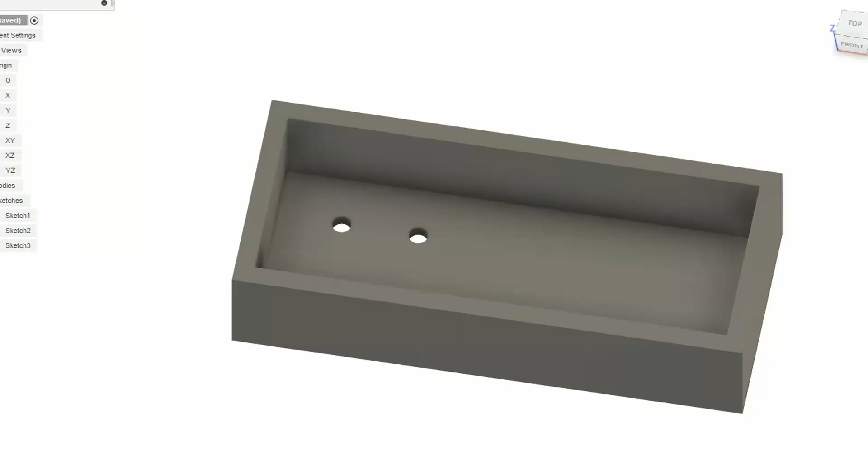In our previous video we learnt the basics of how to create a box. So the box itself, while very useful, isn't very exciting. So in this video we're going to learn how to add the nicer features like a smooth edge using chamfers, fillets, and then how to do an offset plane and add some holes that simulate real threaded screws with countersunk heads. So let's jump straight into it.

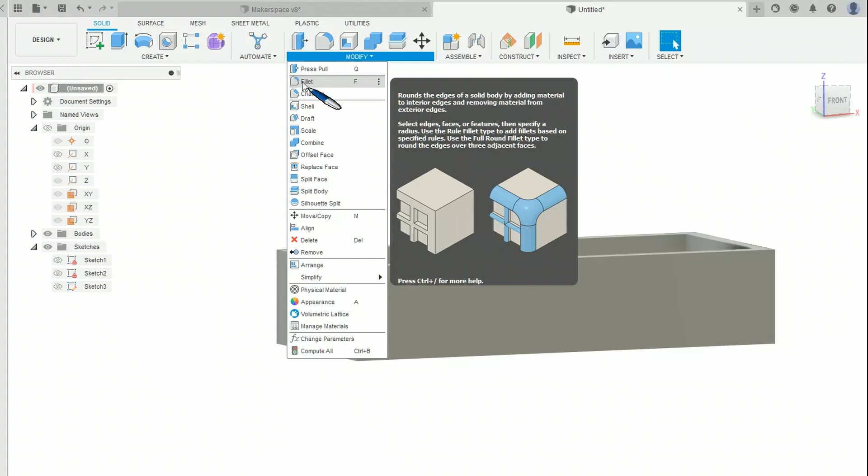So next I want to remove these sharp edges. There's two tools that I can use for that. One is the Fillet Tool that gives us a rounded edge, and the other is the Chamfer Tool that gives us an angled edge, which by default will be 45 degrees. For some of our initial edges, so I'll select that, and I'm just going to do the 4 corners here. So I'm rotating and just selecting those edges one at a time.

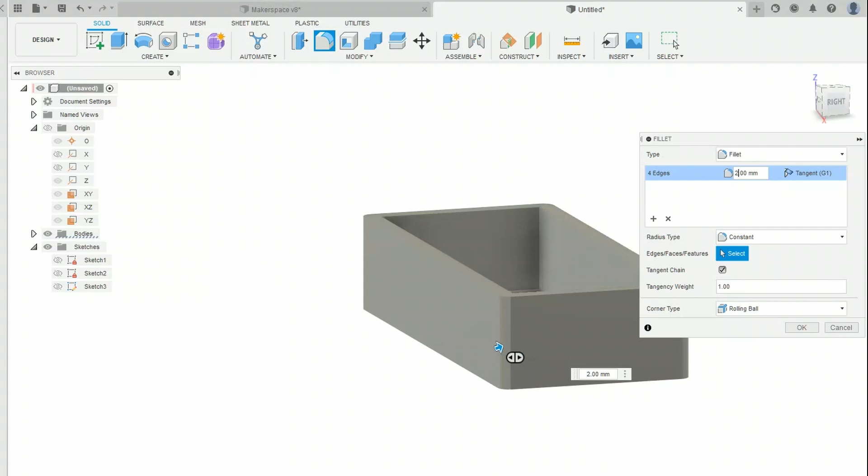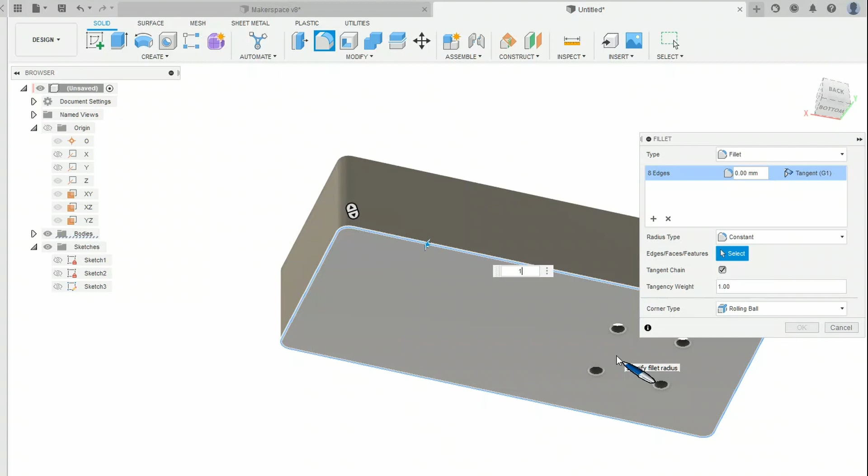So it tells me up here I've got 4 edges, and I want that to have a 2mm edge rolling on it. So you can see from the top view and the preview, that makes it look a nice clean edge there. So I'll click OK on that. And now I want to do the same. So again, using my Fillet Tool on the bottom, but I want a different angle. So I can select that as one complete closed surface, and I'll state that that will just be a 1mm. And OK.

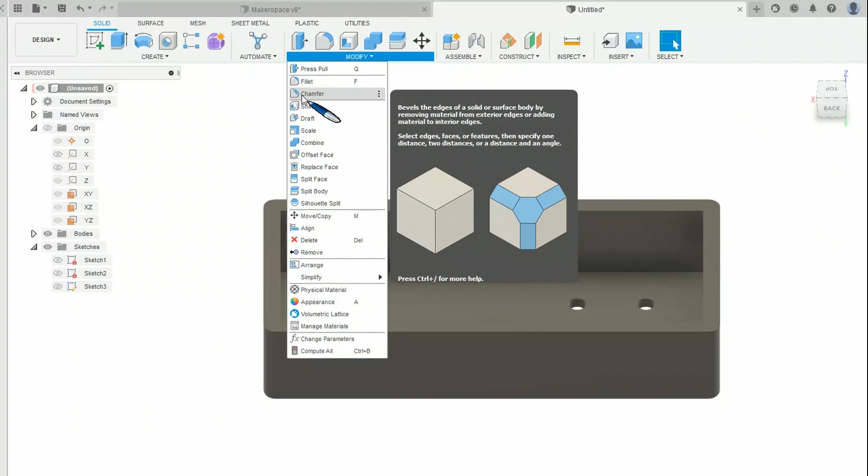In a moment it'll update, so you can see it's a little bit slow there. So I've now got 2mm on these edges and 1mm on this edge. So I've got some nice clean surfaces to work with. Choose chamfer. So I'll choose that outer, and I want to chamfer by 1mm. And again, in the preview you can see that's got a nice 45-degree edge, including over the bends.

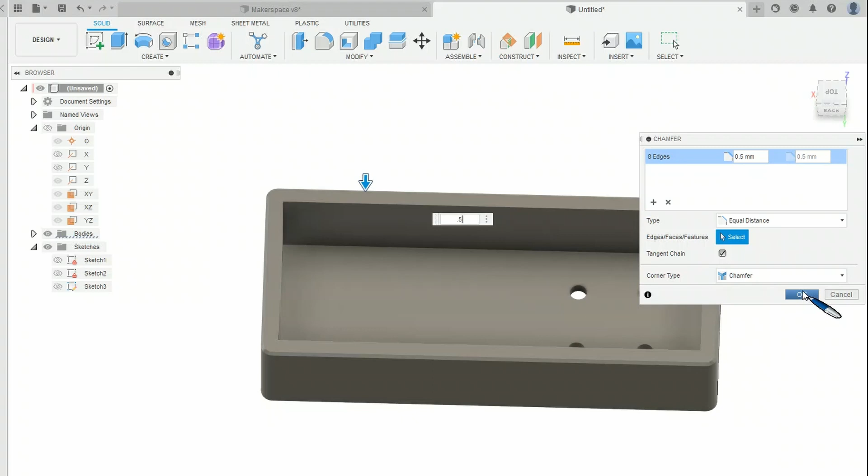So because this is going to have a sealed lid on it, I think I'll actually do that a bit smaller, so I'll go for 0.5 of a mil. And OK. So now I have all of my edges nice and smooth, so there's nothing sharp I can catch myself on, and the inside, it doesn't matter at this stage.

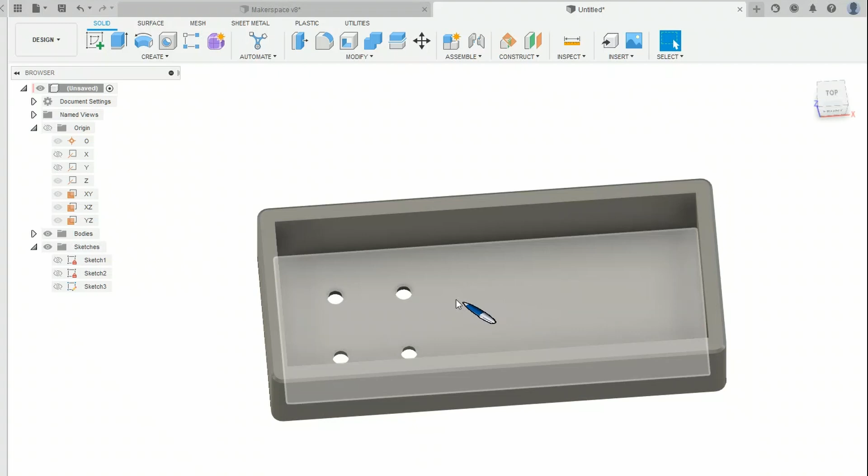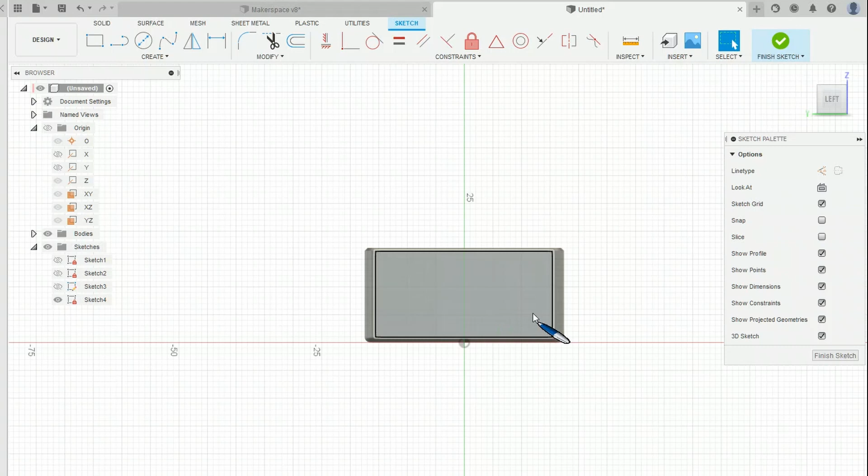So far all of our sketches have been working from the back of the unit. We're going to do a different plane now, and then we'll take it to a totally different level once we've got the hang of that. So I'm going to do another sketch, but this time I'm going to do it on this plane here. So I'll click on that. So it's automatically orientated me, so I'm looking straight onto that.

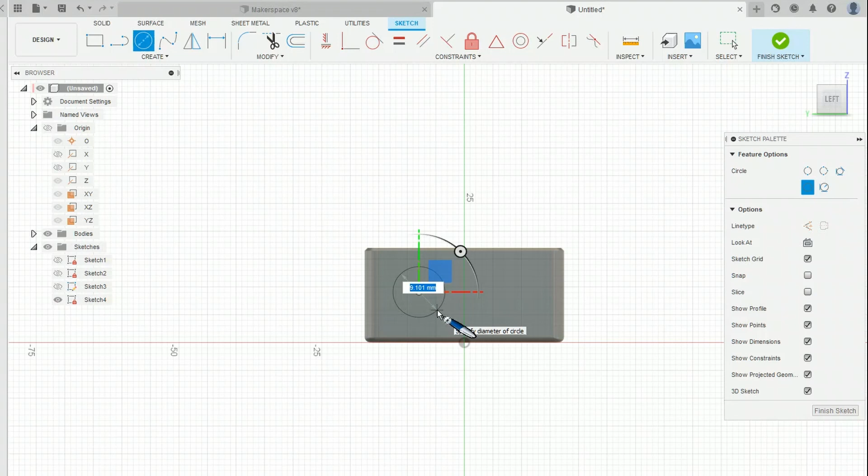And I want to put a hole through there. So let's draw a circle, and I'll just draw it offset from the center for the moment. And I want to make this a, let's say, a 10mm circle. Now to get that to align to the center, there's a few things I can do. I can click and drag, and you'll see when I get to the middle, depending on where I go, I can get it to snap to different points, like that triangle there.

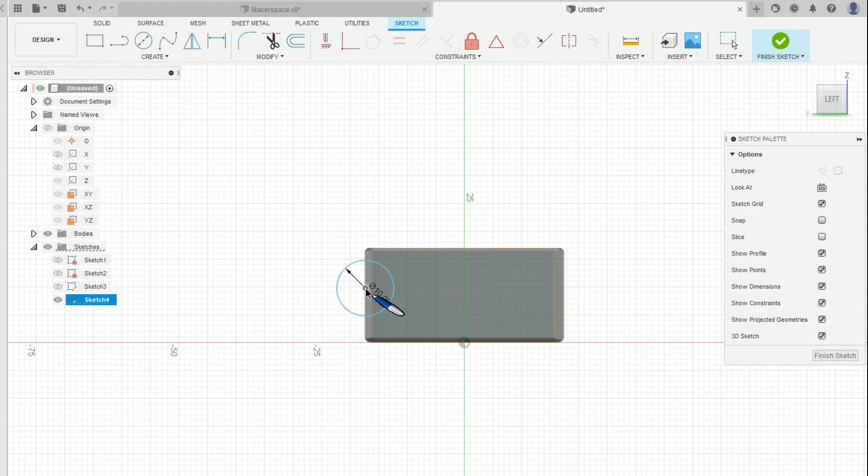The triangle means it's at the center of a line. If I was to do it on this edge, you'll see another triangle somewhere along here. There. And as I go in this case, it gives me a dotted line. You would have had that when I went down as well, but the green line was covering it. So I can bring that over and snap it to the green line, and I now know that I'm in the center of that line and the center of that because of those triangle snaps that happened.

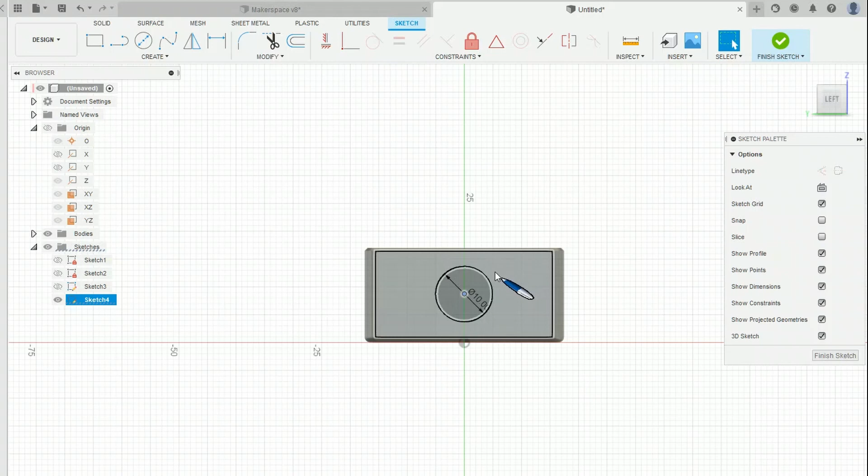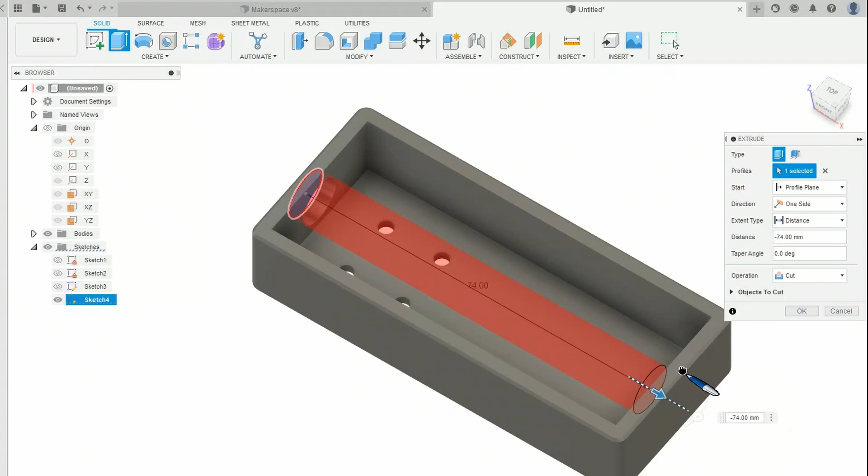So I will finish that, and I'm going to make that a cut through. So I'll pull it down, and I could actually say, instead of just being on that one surface, I want it to come all the way through the other end. So you can see like that, it's making a hole right the way through. So to make it clean, I'll just put it to an object, and I'll click on this as the object, and there it is.

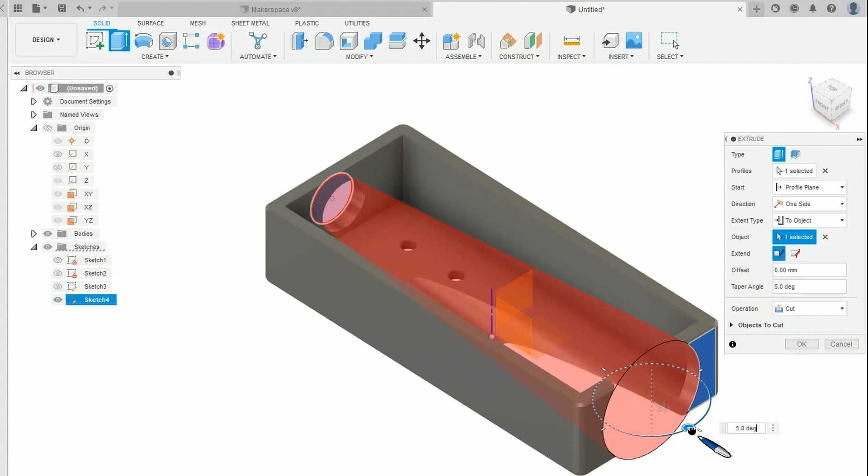You might notice that we've got this handle here. So I can actually make that cone-like. I haven't ever found that I've needed to use that, but it is there if you need to make it flange out for some reason. So we now have a hole right the way through the box based on a different plane.

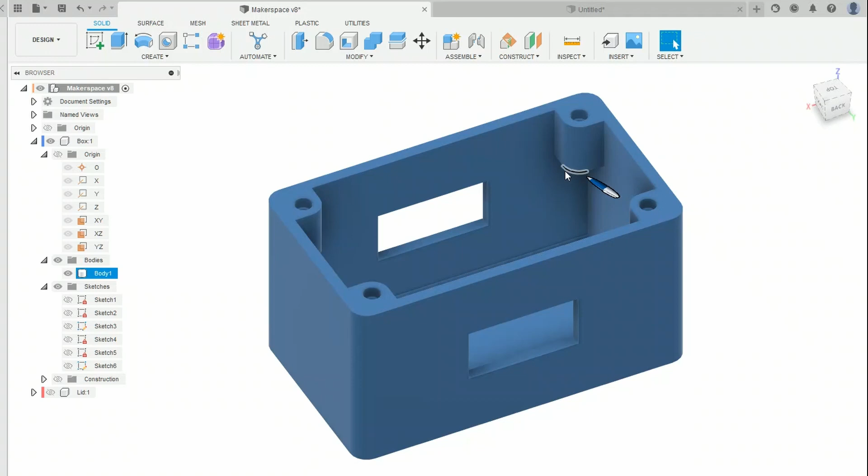So where I've got these surfaces here, I could actually create a plane halfway up the box to say I want to draw from this point. Now in the case of these, that would actually be silly because we could just draw from the top one downward, but for argument's sake we're going to make a plane that's offset from the base to draw these.

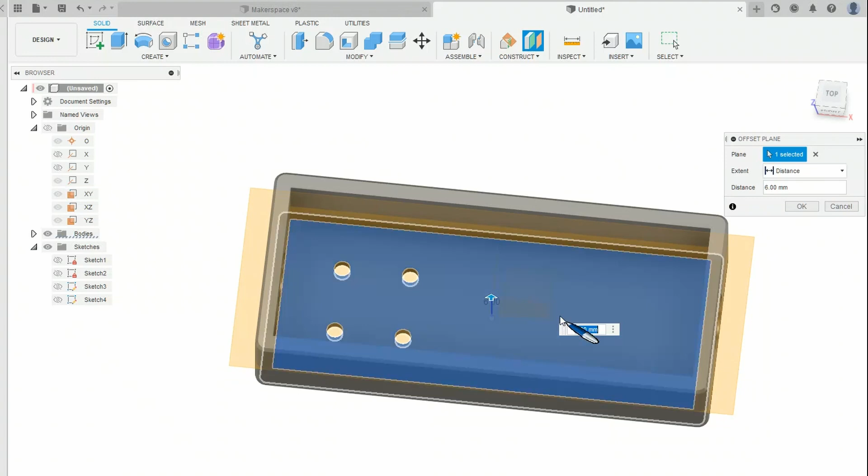So I'll come back to our drawing and I'm going to do an offset plane. So that literally offsets from another surface. So I'm going to choose the inner base as my surface, and I can pull it up or just type in a value, and you can see it's drawing this area that we can then do additional drawings on. So it's called a construction plane. We construct things from that.

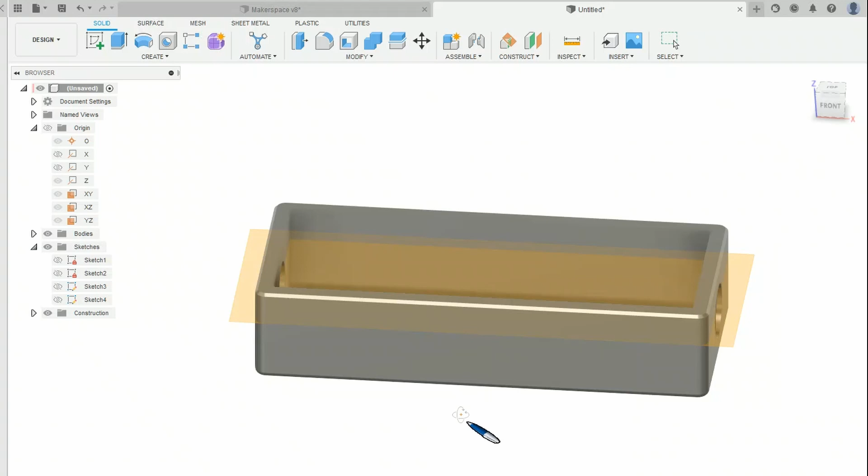So I've come up by 9 mil. I know my box was 15 mil to work with, so I'll go OK on that. And I now have this transparent area to draw on, and if I look over here, we've now got a new section called construction, and we've got this plane which I can turn on and off. So what that means now, instead of having to work with the bottom surface or the top surface, I can work with a surface somewhere in between.

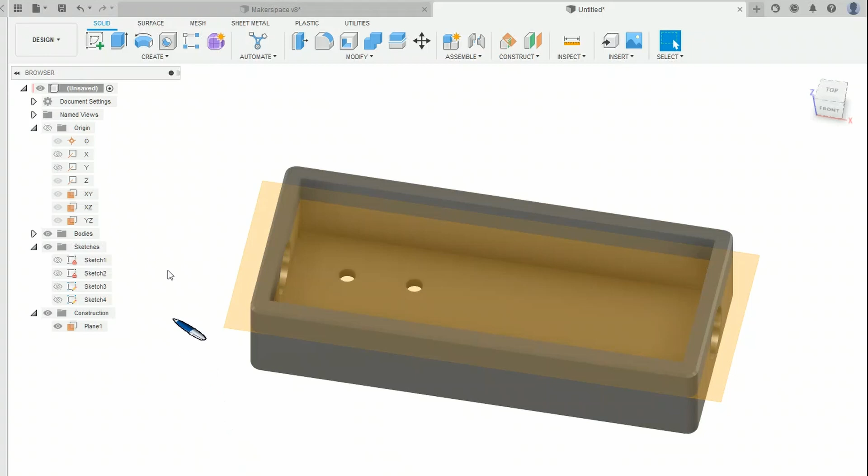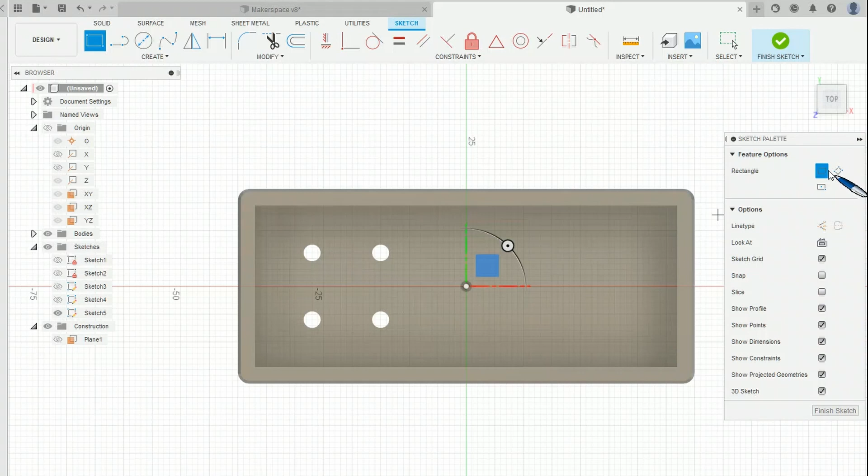So I'm going to do a sketch onto that plane, and we'll draw some lugs that we can mount some holes on. So to do these, I'm going to start off with a rectangle using just the standard 2-point rectangle, and I'll put 1 point in the corner there, and I'll come out and we will make them 6 mil on each side, and enter.

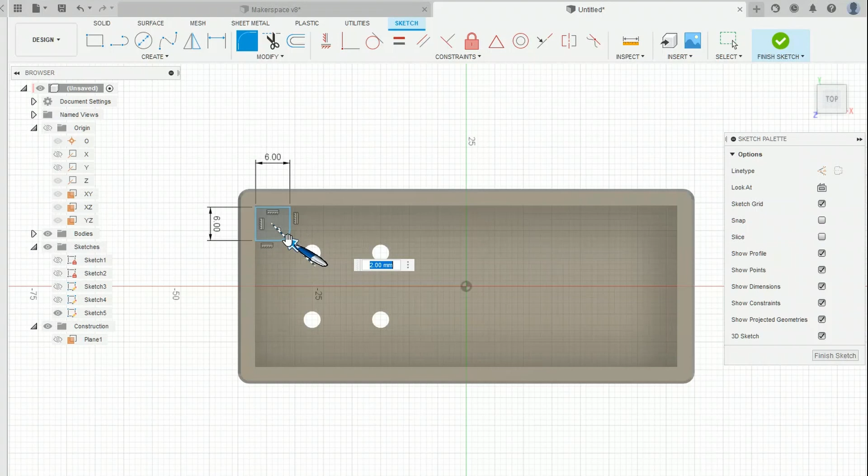I don't want this to be a sharp inner corner, so I'm going to use the fillet, which is similar to the fillet that we used before, but we're doing this at the drawing level. So I've chosen my two sides. I could have just chosen the point as well. It's a 2 mil fillet, and I'll hit enter on that.

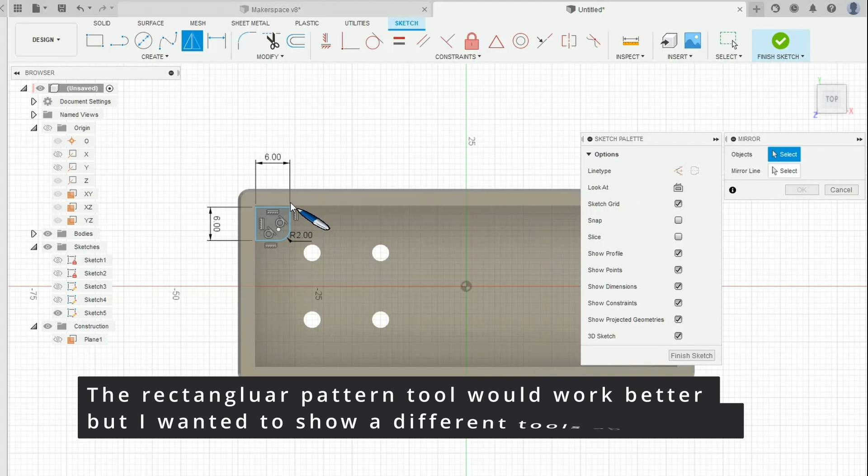And I'm going to show another feature. We could have, using rectangular pattern, done the 4 corners, but we're going to do it this time with the mirror tool. So the mirror tool allows us to mirror across a center line. So I'll select my objects, which will be these points. So I've got to select, in this case, all 5 points. And then I select my mirror line.

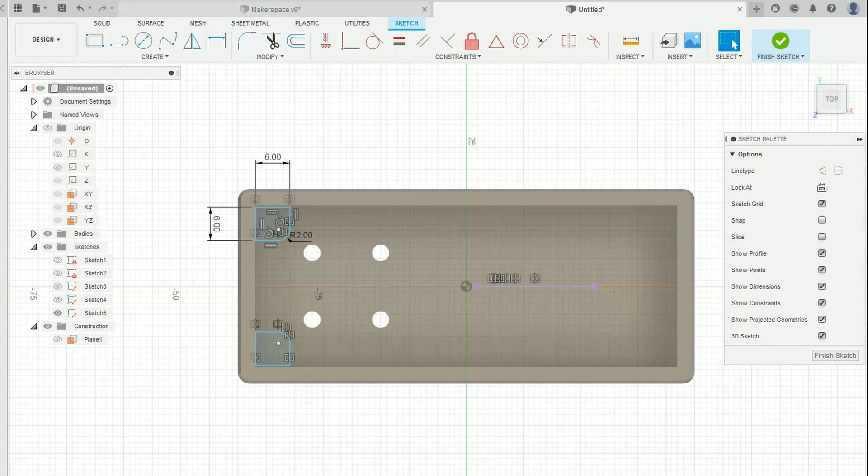Now you might have drawn in a line, but I'm again just going to use my X or Y axis. So I'll do the X first, and it's appeared down here. So I'll go OK. And I'm going to repeat that process again, choosing, this time I'll do a drag to select. So I'll select all of those, and I want to mirror across my Y. So if I just move this across, you'll see it's going to draw it there.

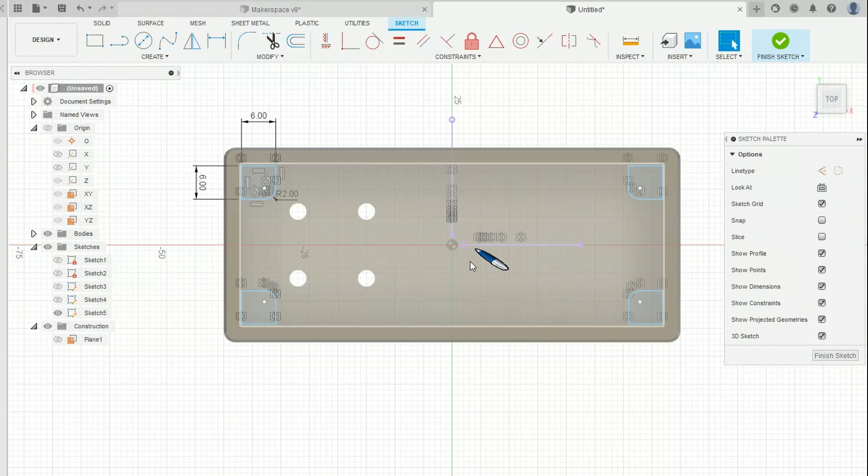Now this has created a whole lot of constraints. Kind of ugly and messy for what we're doing. I just did that as an example of how we could do it. In reality, I would actually use rectangular pattern to do that one there. But like we've seen before, if I now say, oh, I want to make this one a little bit smaller, I want that to be 3 mil, it will do it to all of them automatically. So we'll finish that one.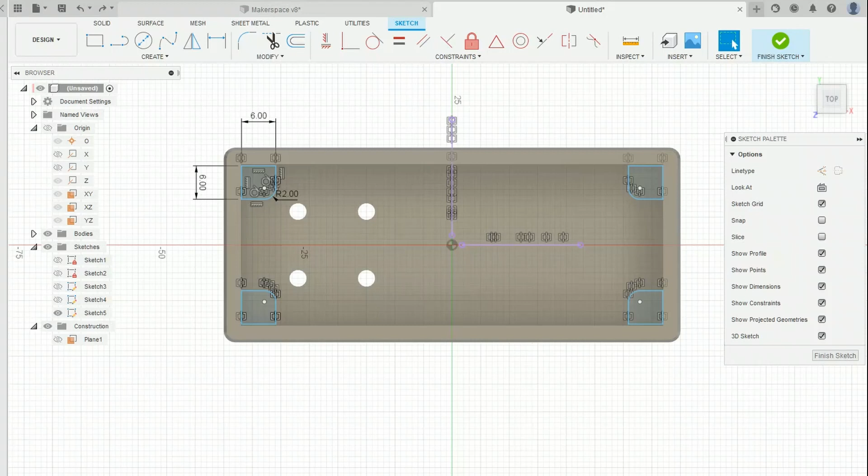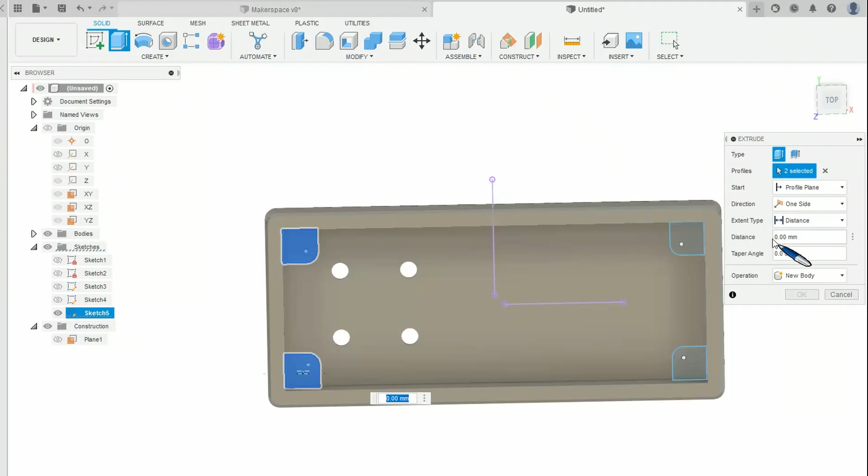And you can see that it's now halfway down the box. It's not at the top or the bottom, it's at that construction plane, which has now become visible because we've used it. And I'm going to extrude these, and I will select all 4 of them. And I'm not going to go quite to the top, we'll go just a little bit below. So we've got 5 millimeters there, leaving just a bit of a gap.

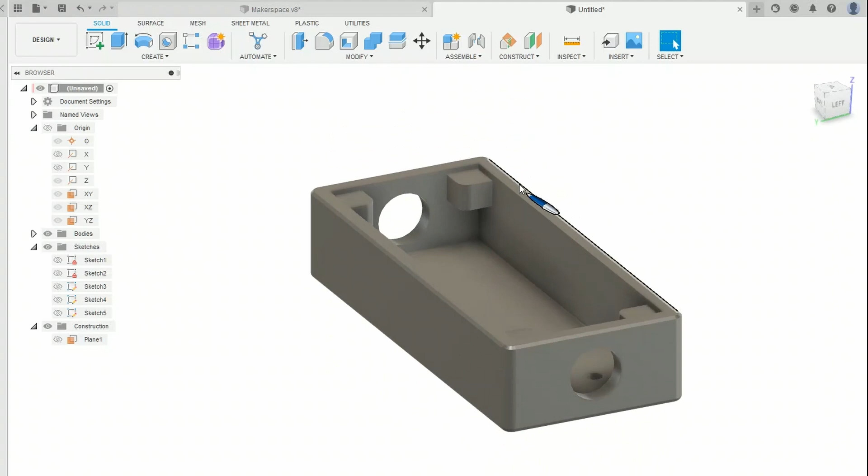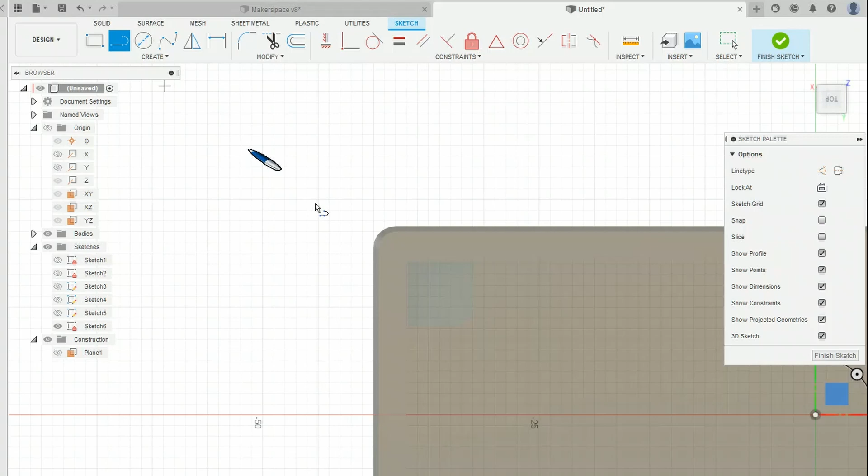So next step will be to put some holes in these. So I now want some holes in these 4 points as mounting holes. So I'm going to do a new sketch on that surface. And I'm just going to throw a couple of construction lines in to start off with, and I'll hover this point here, which will give me that little center point diamond. Zoom myself out, come over to this one and click there. Hit escape so I can start a new line.

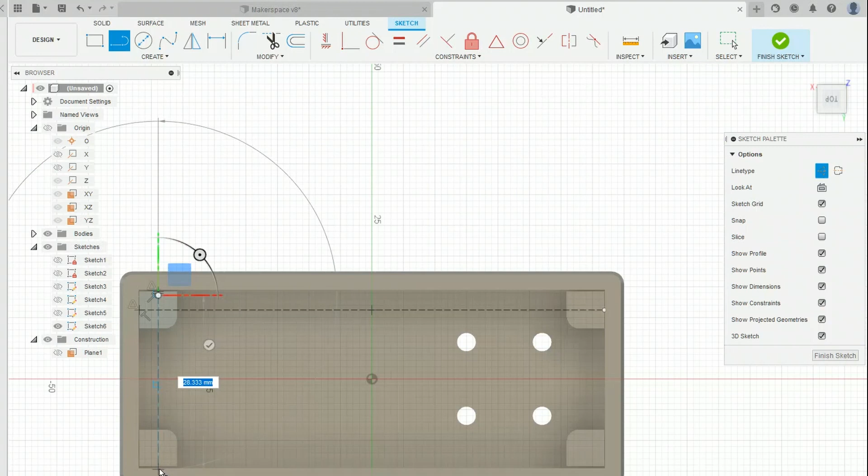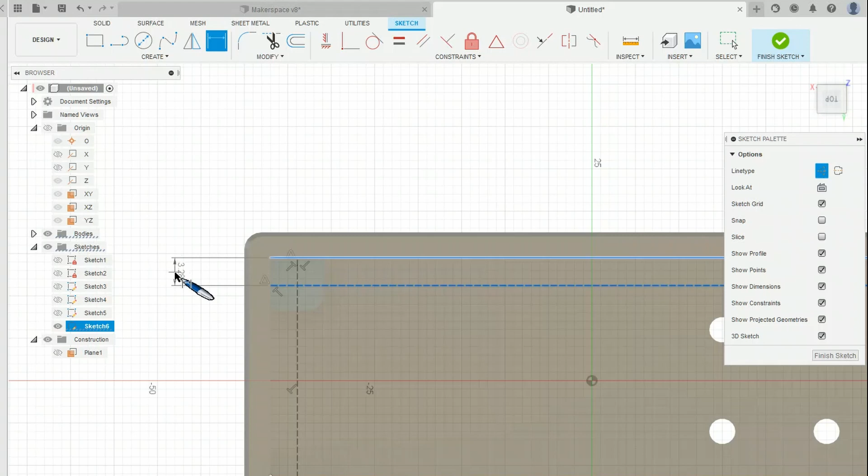So the constraints that we've got here are the center point, the triangles. We've got the 90° or the perpendicular constraints. But what I'd like to do is make these distances the same. So I'm going to put a distance from here to here, and it's going to tell me an error, over constrained. I'm just going to say, yep, that's fine, create driven. And that's telling me that this distance here was already defined because of that center point that we'd chosen.

But what that's allowed me to do now is if I do a measurement from here to here and click, instead of typing in a value, I can just click on that one and it will say, all right, I'm going to equal D33, which is the reference of this. If I hit enter, it now tells me it's got a formula and it's exactly the same as that one.

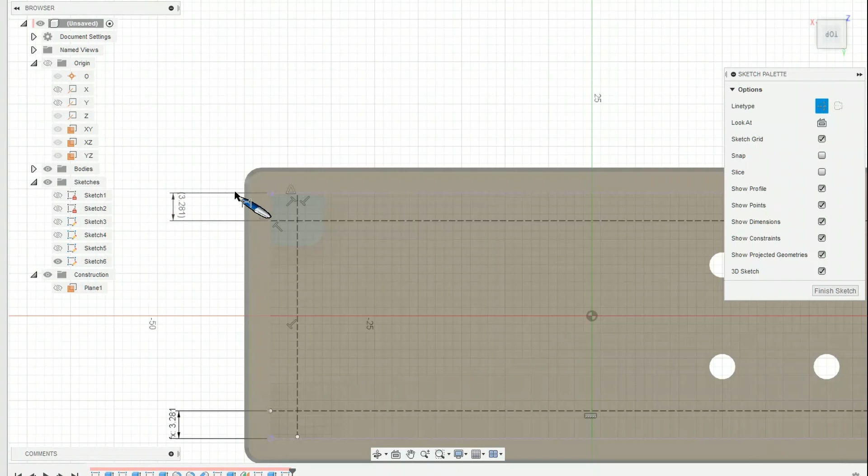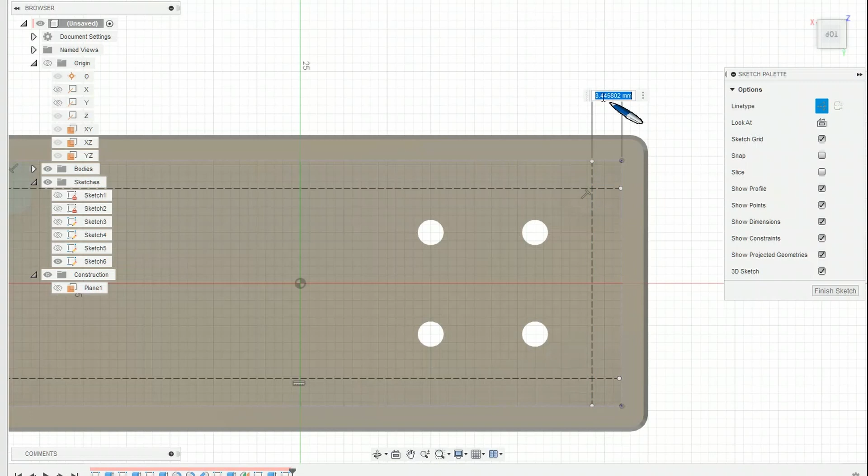So we can do the same for between this point and this one, accept the warning. And then down here between, we don't need to do that because it's already done by the top. So come over to this side and I'll select that one and that one, put the measurement in, and rather than typing a value, I'll click on here and hit enter. So that's now made them all the same distance.

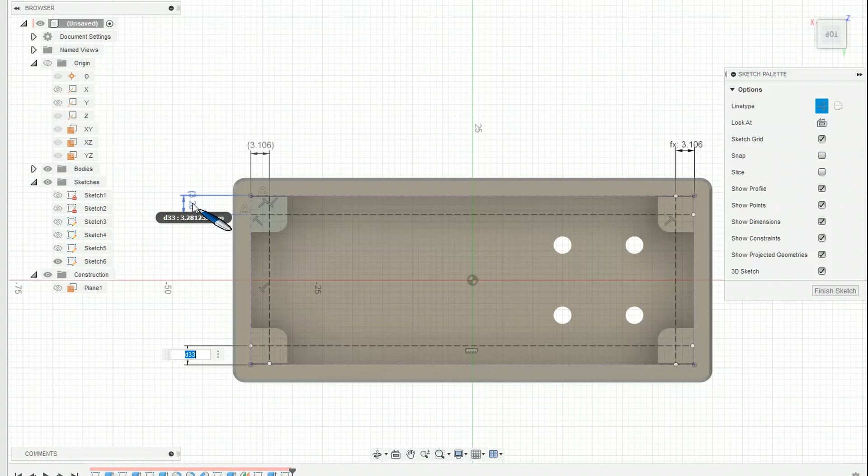So that's called using a reference as a measurement. So if I double click on this again, it will tell me that it was D33. It's not easy to see which one D33 was, but in a simple sketch you'll remember that.

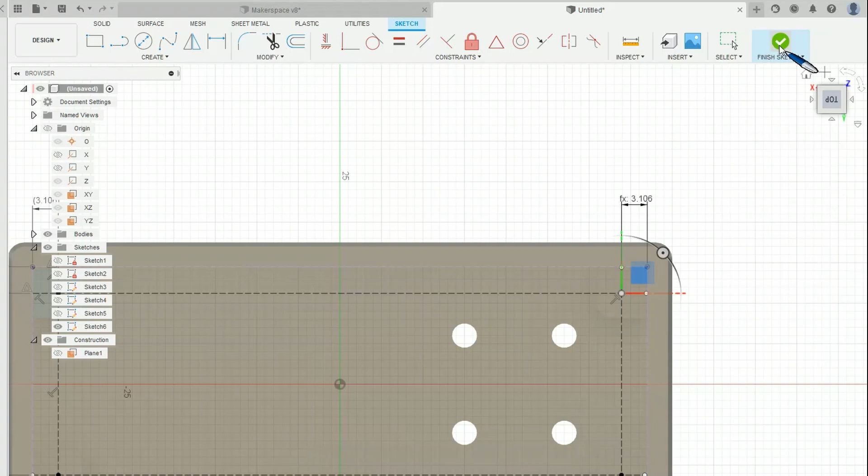So next I'm going to put a point on the page. So I'm going to click into the centers of each of these, 1, 2, 3, and 4. So I've got these dots that have appeared and I'll finish my sketch. Now the reason I put points there instead of just drawing a hole and pushing it through like we did before is I want to use this hole tool.

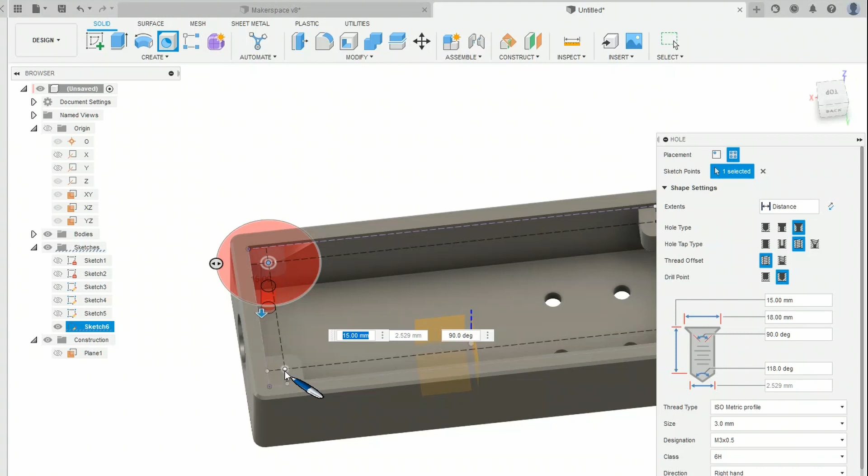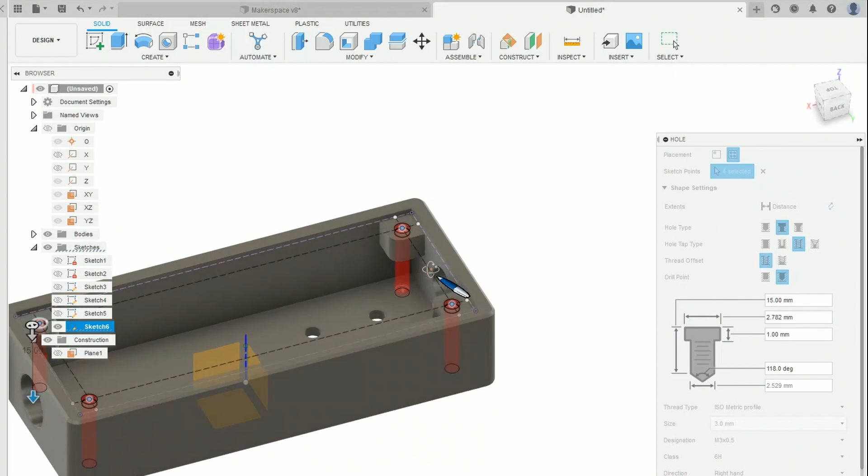So with that tool I can select my points. Just bear with me for the ridiculously large size that's coming up. So I've got my 4 points and it's given me some choices here of different types of holes. So I might want a hole that has a countersunk top, which is what we're seeing here, or I might want one that has a counterbore, which means it's got a little bit of a hollow that your screw head can completely sit within. Now I'm not actually going to use this for a real purpose, but again it's just demonstration.

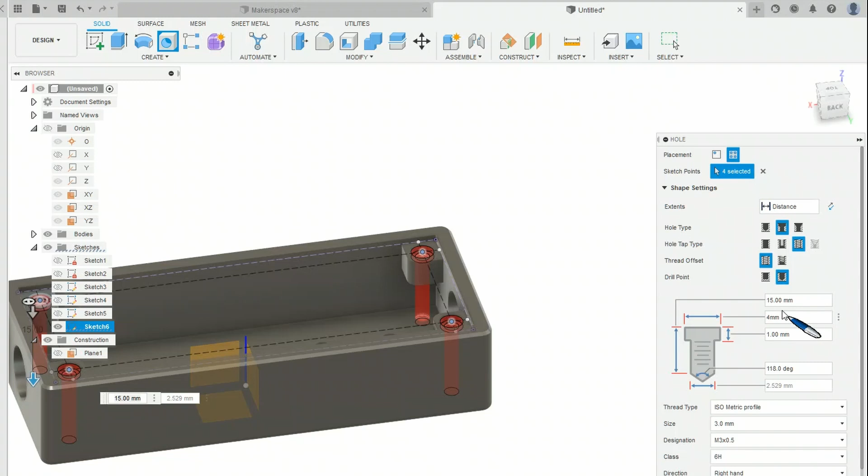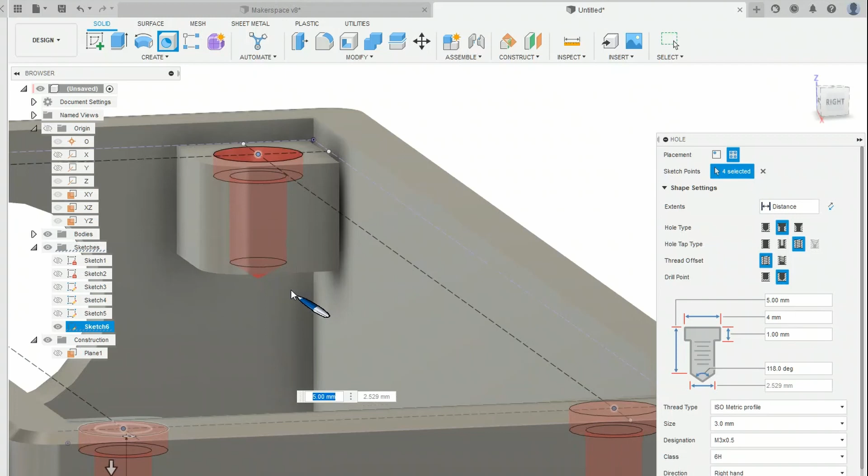I want my hole to have a width for this bore of 4 mil. I want it to have a depth of, we'll leave it as 1 mil, and the overall hole length go down by say 5 mil. So 5 mil isn't quite through the bottom of this particular hole, but we can see we've also got this point on the bottom, which is actually poking out through the bottom of the base there. I might want it without the point and that would bring it back in.

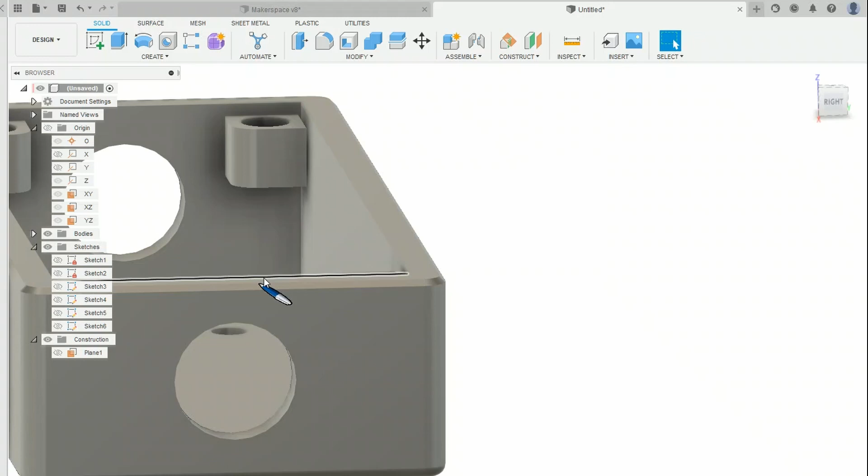So the lower part of that box is now finished. We've created the lid mounting holes, the back mounting holes, a feed through the side, some chamfers and some fillets. What I'm going to do is save that. But before I do, I just want to point out that we've got all these named things here. And if I later on want to change something, it can be quite confusing. So as I was going along, if I was doing a complex drawing, I'd start to name these.

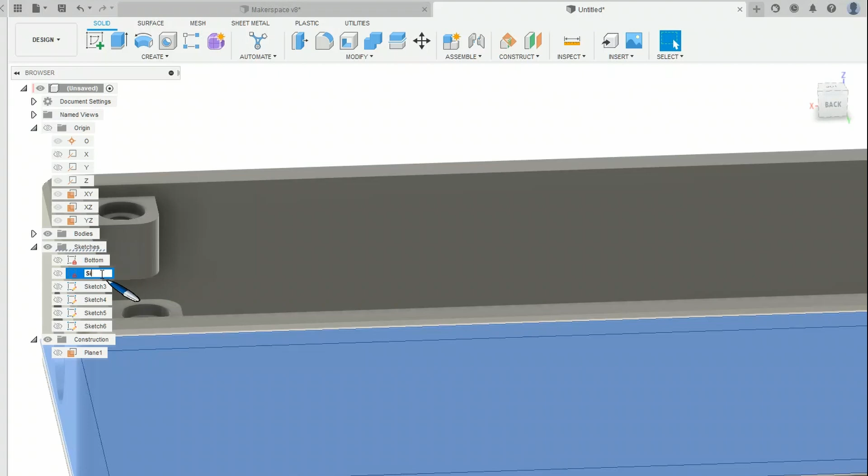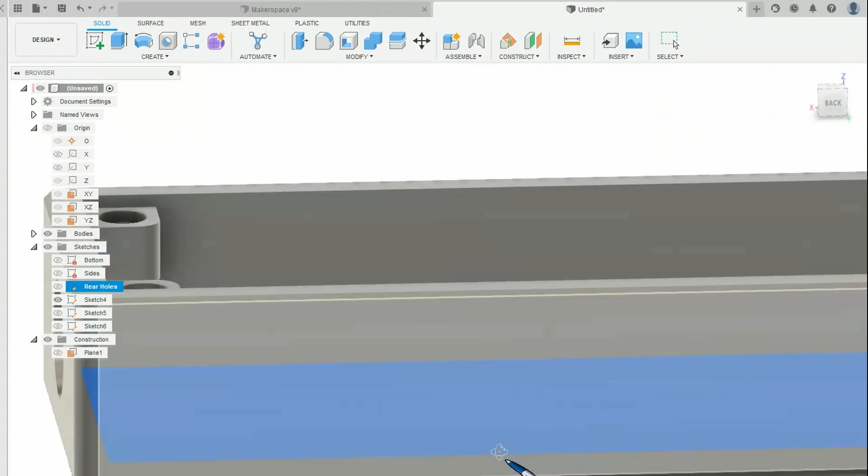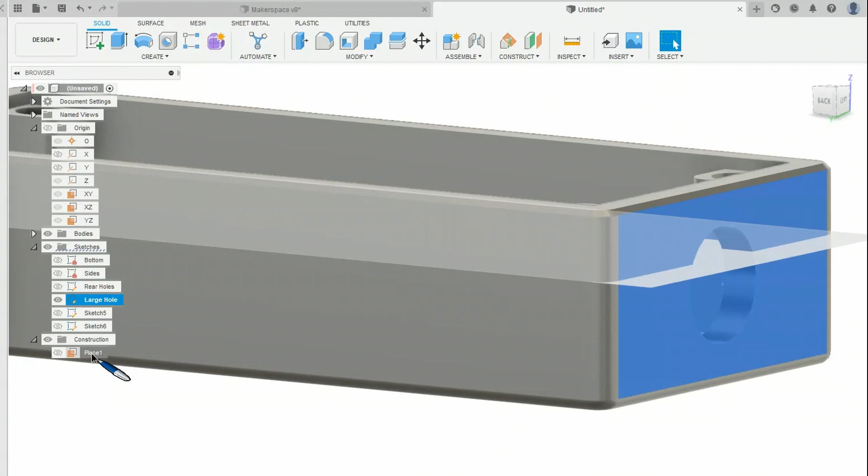So I would have said bottom, sketch 2 was the sides, sketch 3 I think was the holes in the back. I'll just make it visible so I can see, yep, holes in the back, rear holes. Sketch 4, what was sketch 4? Probably the end drawing. Yes, the end drawing there. So that was large hole. So I won't keep going, but you can get the idea. You can name these different sketches. Likewise, I could name that plane that was halfway up, so we'll call that mounting lugs.

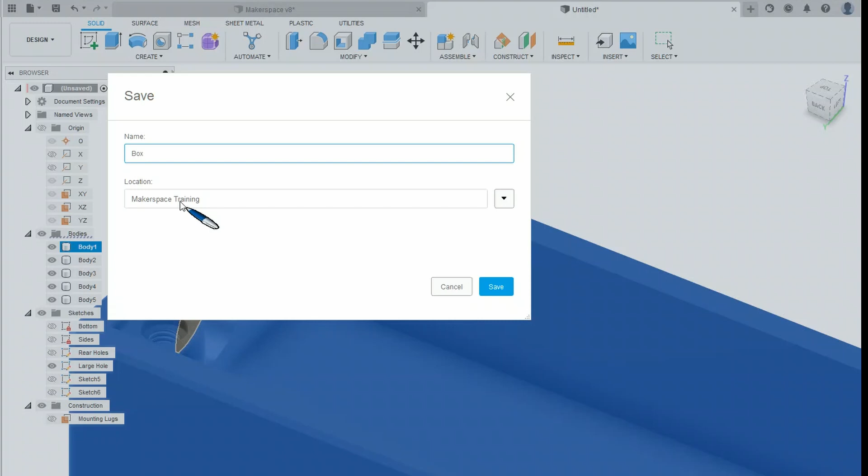So I'm going to save that now. So if I come up here and go save, give it a name, we'll call it box, and the location will be demo box 1. So into that one. Don't think I need to tunnel down yet. Double click on it, save, and you'll see it will come up that it's now called box and it's version 1. You notice with the others I've got a version 1, a version 8. Every time you do a save, it will actually save the version. If you just close this without saving, it will actually create a copy or save it effectively, but it doesn't increment the version.

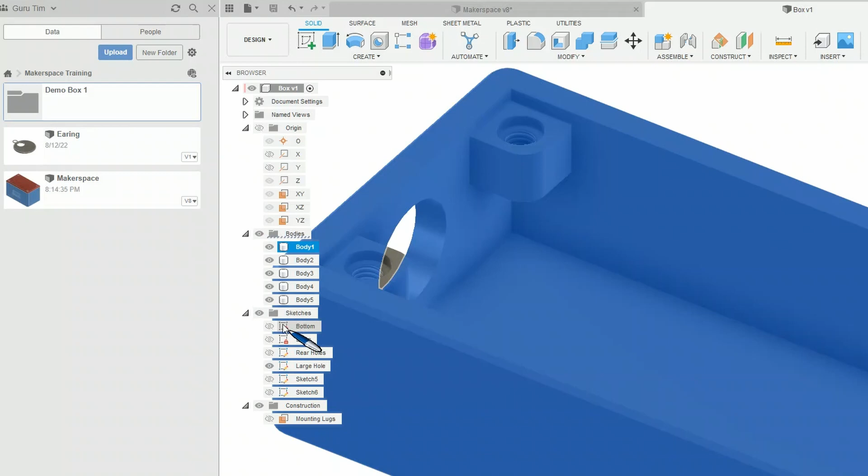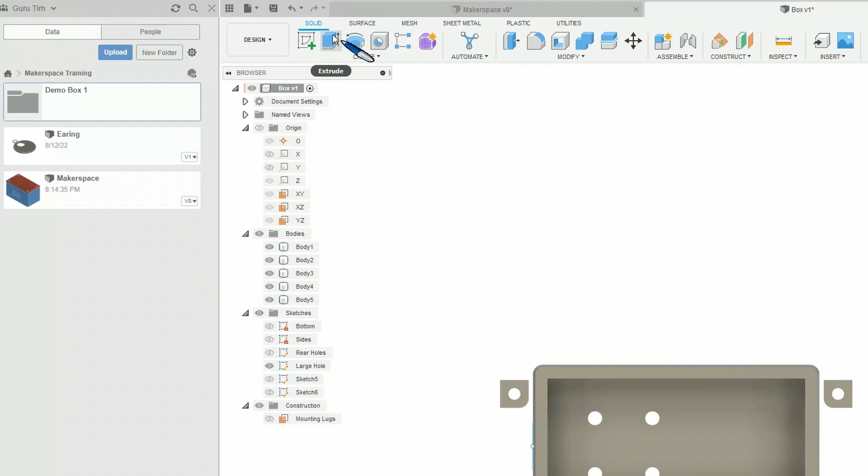If I was to save this a second time, so let's make a minor change to it dimensionally, see how well I've done this. If I change this back to 60, hopefully everything else follows. Now I've hit a problem here that these weren't constrained to the inner edges. So I should have actually, when I was doing that drawing, projected these lines and constrained to it. But if I did a save now, you'll see it prompts me for a version description, and you could say it's 60mm box or something like that.

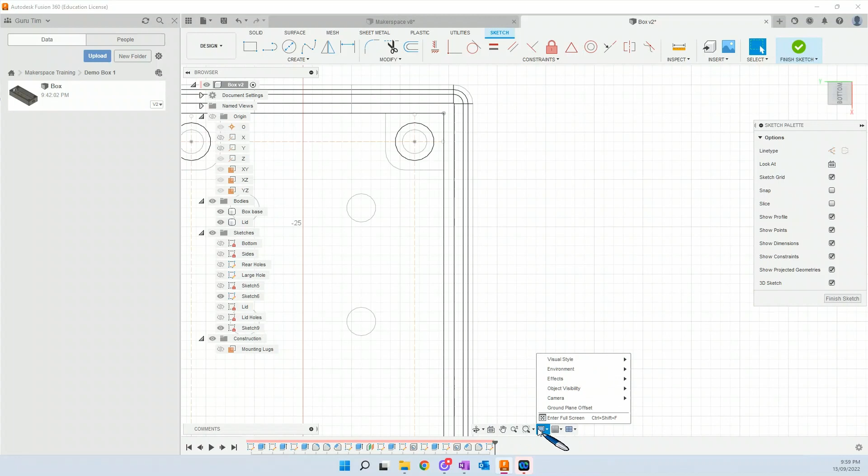In the next video, we're going to look at how to create the lid, which will focus on projecting parts. So it'll be a new component and we'll project parts from the base component, and we'll also revisit doing the chamfers and fillets and all those sorts of things just as a recap.